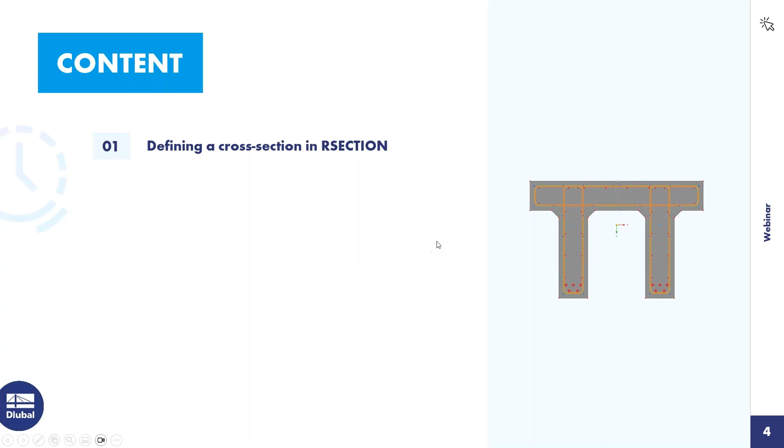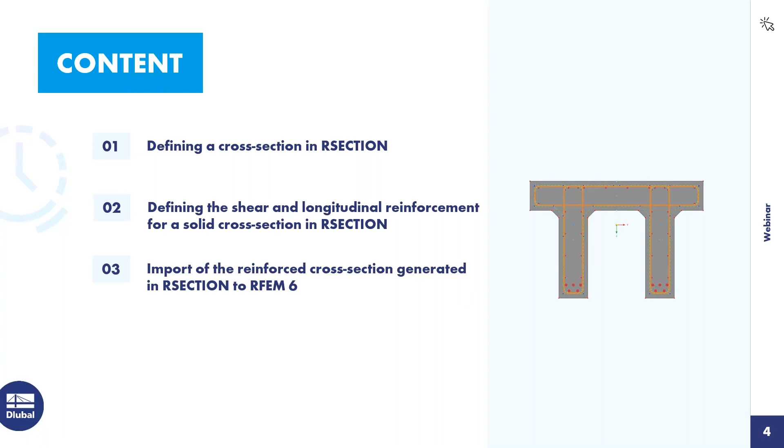To the agenda today: at first we will show you different options to define cross sections in our RSECTION program, meaning Paul will do that. Then he will define the reinforcement for the cross section that you see on the right side. Then Paul will import the section in RFEM 6, and then he will design the cross section in RFEM 6 with the help of the concrete design add-on.

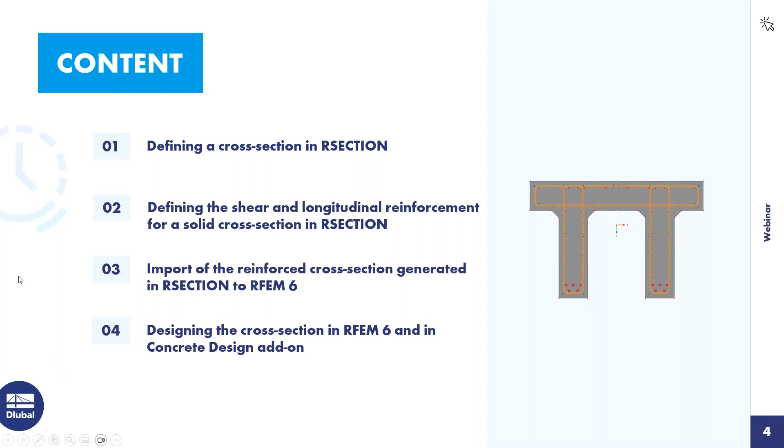Okay, then I hand over the screen to Paul. Paul, it's your turn. Okay, thanks Andreas for the introduction. I can directly start with our standalone program, RSECTION, and I will create directly a new model for our section.

So I'm entering here a model name. Let's just name it 'RSECTION' and maybe '1', because I will show you multiple ways to define a section in this program.

What's important now is if you would like to apply reinforcement on your section and do the concrete design, then you have to check this option here, concrete reinforcement. As you see now, a new tab appeared, reinforcement settings. Inside this tab you can define the value for the concrete covering. It is set by default to 30 millimeters, and for today's example I will leave it at 30 millimeters. I just confirm it.

And then we get this view here. So we have our navigator, our tables, and our graphical window. Now we can just use the options in our RSECTION program to create any type of massive section.

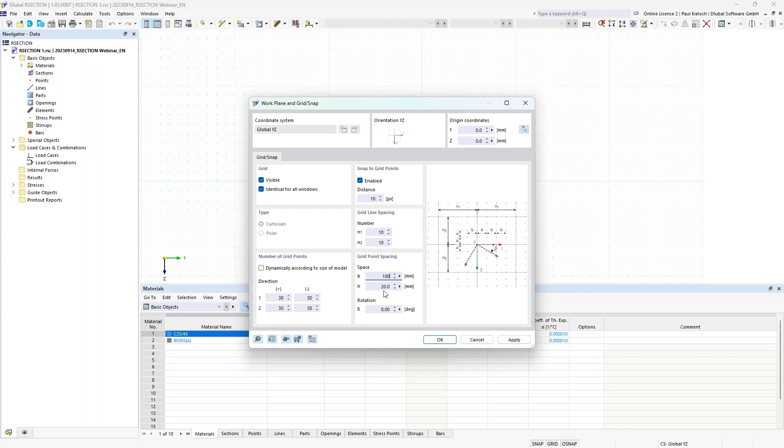I will start here with the first example, creation of a section by using lines. So therefore I will first create or modify the grid. I'm opening the settings for the grid and I will change the grid point distance to 10 centimeters. In this way I can start with the graphical input of the cross section.

Before I do that, I can tell you something about the materials. In this case, the program has loaded 2 materials from my last file, so in this example it already fits perfectly. I need a concrete material for the section and a reinforcement material. If you do not find the proper material, you can apply or create a material in the same way you already know from RFEM 6.

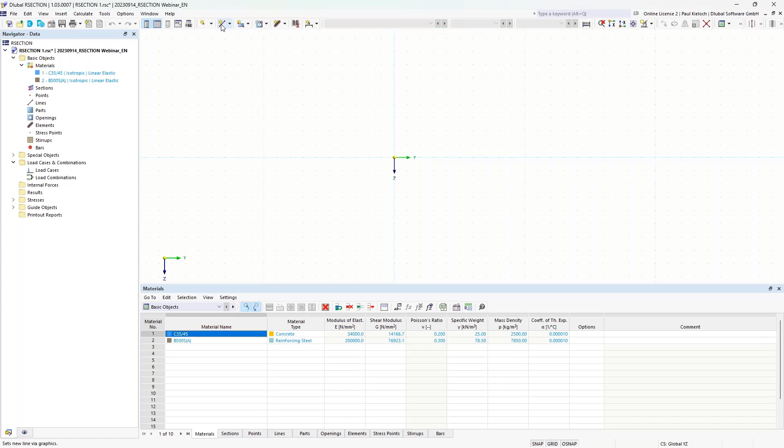As I said, in the first example I will just create boundary lines for a new section. For example, I can do it this way, just clicking into these grid points to create a random section. It could look like this.

If these boundary lines are defined, then you can create new parts. Compared to the old program generation, there we had two programs: SHAPE-THIN for thin-walled cross sections and SHAPE-MASSIVE for massive sections. These two programs are now combined into one new program, RSECTION. So you find here both types, the elements for line elements and also the parts if you would like to apply massive or create massive sections. We are dealing today with massive sections, so I will use these parts to fill the boundary lines with concrete material.

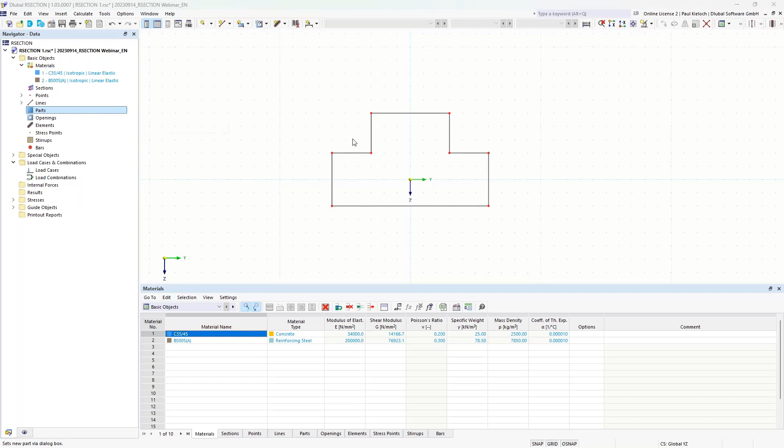I can right click on this chapter and select the option boundary lines. The program has already applied material number 1, and I can graphically select these boundary lines, click OK, and then we see our concrete section, our massive concrete section.

What we also see here are these green lines. That is basically our concrete covering, or the line of the concrete covering. That will be applied in the section once you have activated the option for concrete reinforcement in the base data dialog.

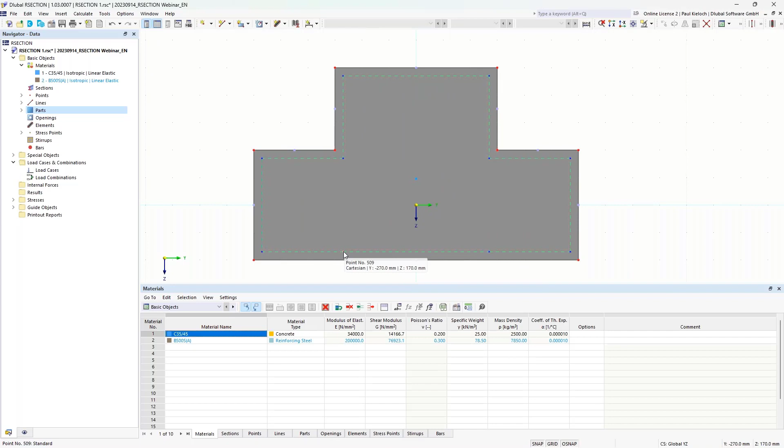What you also see here are these blue dots. They are automatically generated by the program, basically an extension of this line, for example, and the program generates this blue dot. This blue dot can then be used for the stirrups, to define their position. I'll come back to this later on.

So at first, I will just show you 3 basic ways to create sections here in our program.

If you have entered such a section, you can also modify it. For example, you can go into these options in this toolbox, where you find an opening, for example a rectangle opening. If you apply this, the program would automatically generate the concrete covering line for this opening as well. That's the way for the rectangle opening.

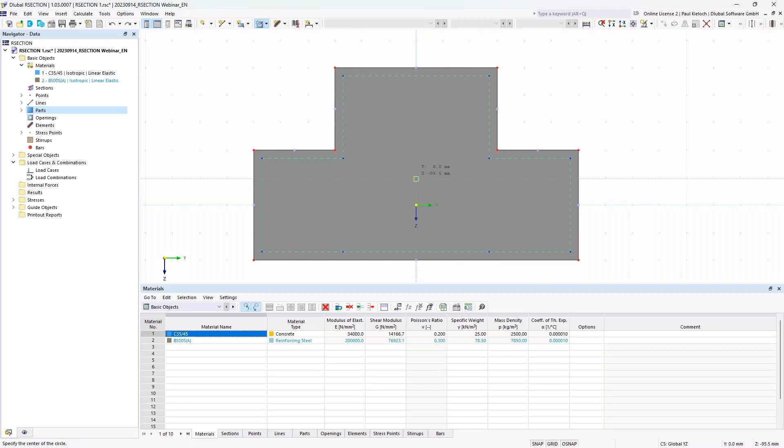If you wanted to enter round or circular openings in a section, for example to create a hollow core slab, you can use this option. If I apply a circular opening, the program would delete the concrete covering. That's because the program currently isn't able to generate the concrete covering for arcs or circular parts, so we can make a short workaround for it.

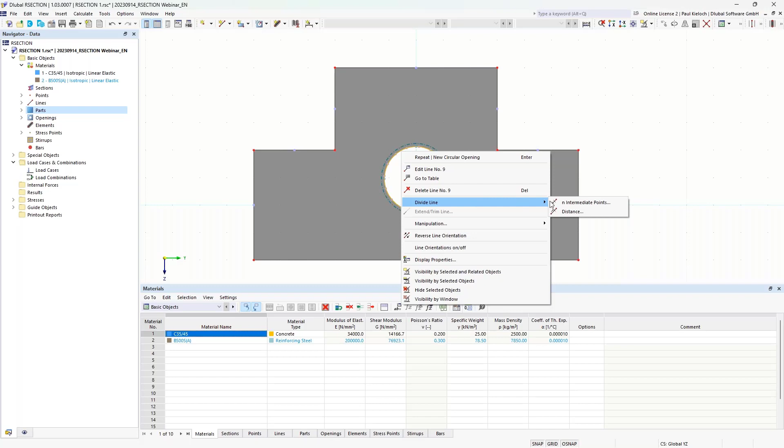I can divide this line by intermediate points, maybe 15 nodes, and then it would look like this.

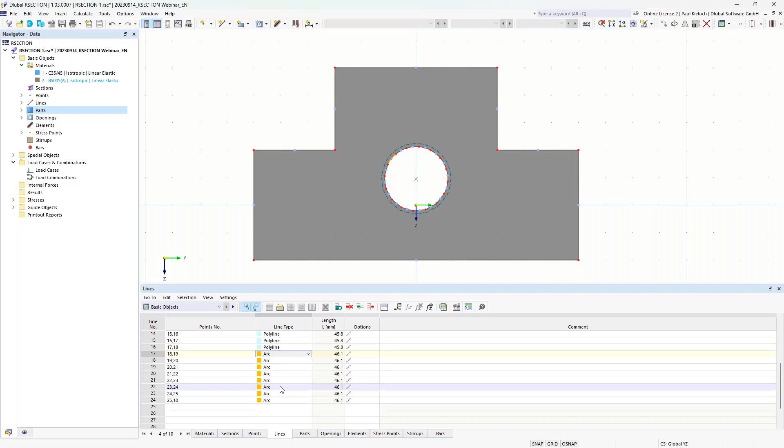Then we can switch to the table with the lines, and you see for the opening the program has applied the line type arc. But if I click on this cell and use the F8 key on the keyboard, I can copy the item from the cell above and apply it to this cell. So I can click through this table and change the arcs to polylines.

If I do it for the last line, the program would again be able to generate this concrete covering line. That's a small workaround in the current state of RSECTION. If you want to apply openings inside a massive cross section, keep in mind that you currently cannot use arcs for it.

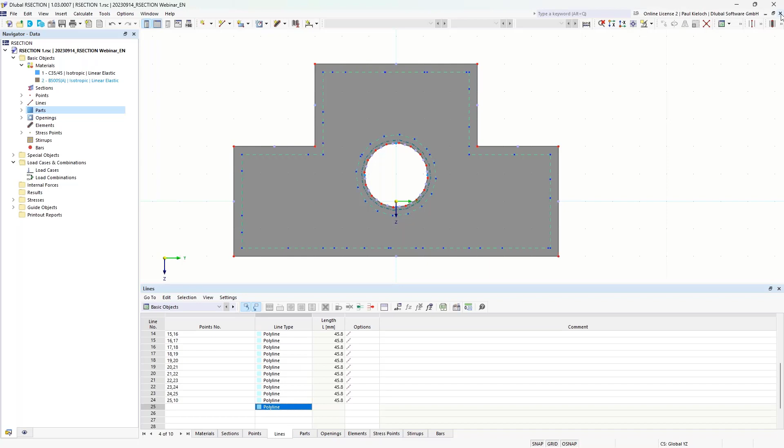Okay, that was the first option. I will save this file, close it, and show you the second option: using the file menu, going to import, where you have the option for a DXF file.

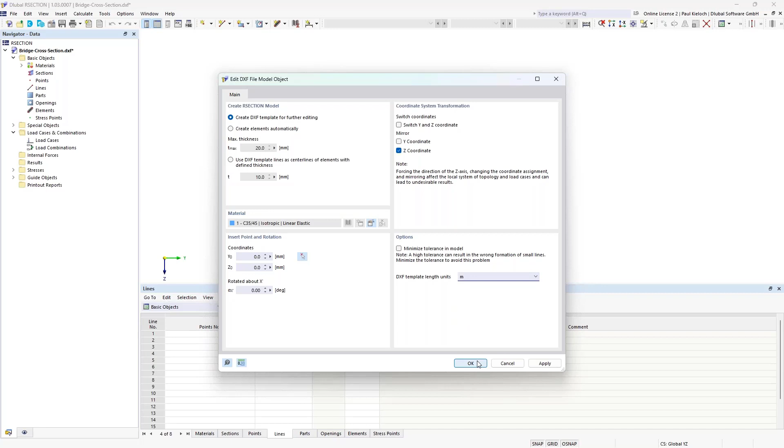I can select my DXF file, click open. Then in this dialog for the DXF file import options, I have to switch or mirror the Z-axis in my example, and switch the dimensions to meter. Confirm with OK, and then I get this section, the shape of a massive bridge cross section. Once again, these are just boundary lines, so there's no stiffness behind the lines.

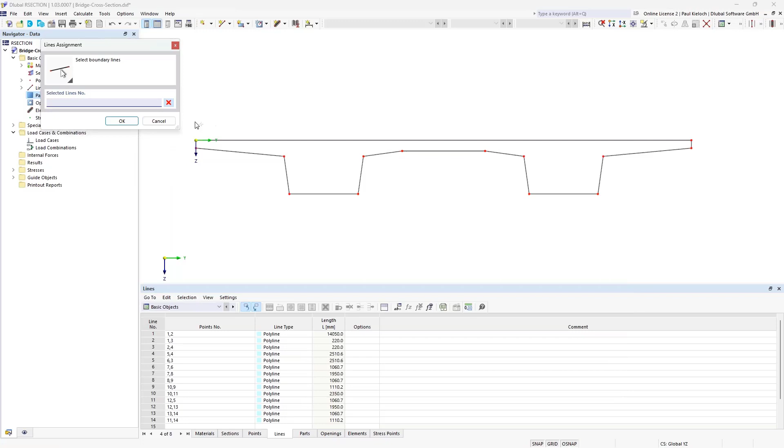So I can once again go to my parts, right click, say new part by boundary lines, select them, confirm OK and OK. What we now see is that our concrete covering lines are missing, because we haven't activated the option concrete reinforcement in this file. So I will save the file.

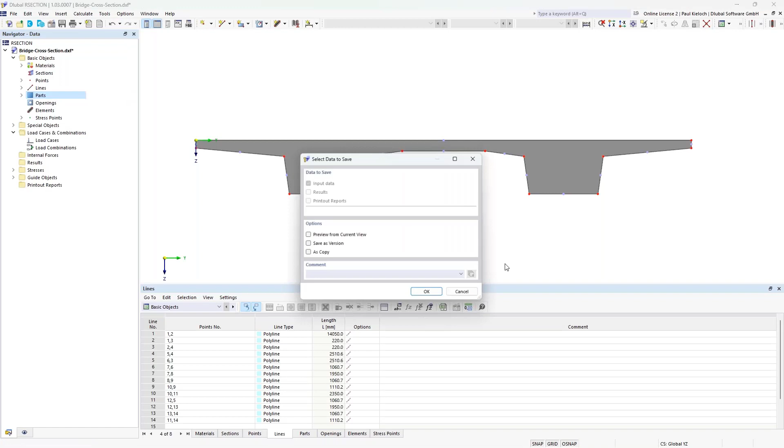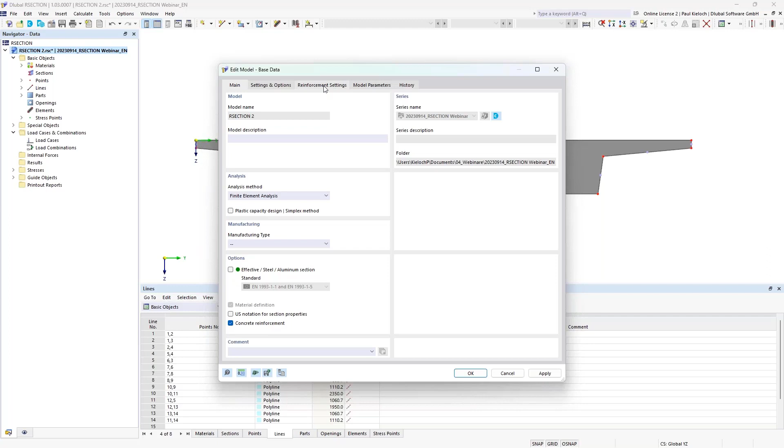Let's call it RSECTION 2 in this example. If I open the base data dialog for this file, I can activate the concrete reinforcement option, and for example change the concrete covering to 55 millimeters, confirm that. Then we see again our lines with the concrete covering, and again our blue dots, our nodes, helpful for generation of the stirrups.

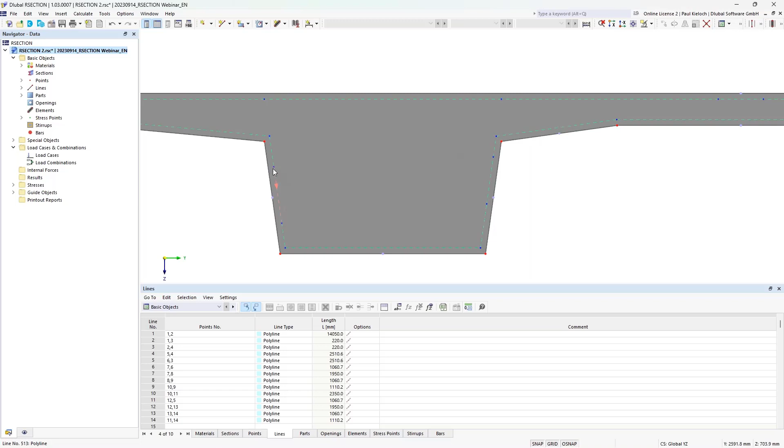This is always just an extended line, for example from this line. If we extend this, we get this node, and so on. Okay, that was the second way, with import of a DXF file.

I will close this once again and create a new one, RSECTION 3 for example. Check on this option once again. I leave the default value here. Now in this example it is important to check the file for the project folder, because later on I will import this section into RFEM 6, and therefore it is required to make sure in which folder you save this file. So be aware of which project folder you create this new file in.

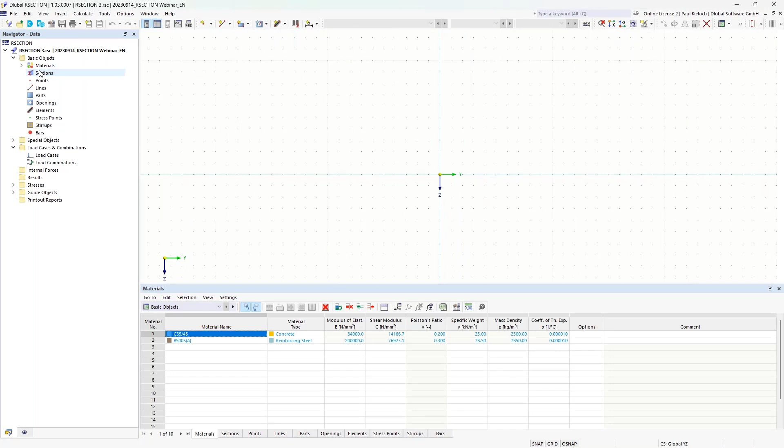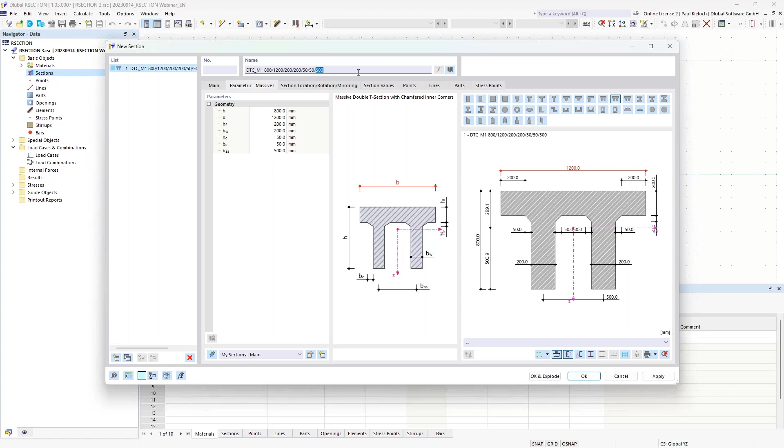The third way how you can create a new section is by using our cross-section library. That is basically the same like in RFEM 6. You can just click here on this button with the cross-section library. Then you have here these massive sections, and for our today's example I will use this cross section here. I will modify the dimensions a little bit by changing the expression or the name of this section, and it will automatically modify the shape of the section. So it looks like this. I can confirm that, and the cross section is created.

Of course, I can now modify the section. I can also assign here openings, like I demonstrated in the first example, or modify the edges or the corners of the section and so on. So you are pretty free in the way you create the sections, and that is a benefit to the regular cross-section library from RFEM 5. You have the option to import a regular section and then do user-defined modification on these sections. Okay, those are the three ways how you can import or create a section.

Next topic would be to apply reinforcement on these sections. As I said before, by default I have already in my example the concrete material that is used by the section, and we have our reinforcement material. Now you can find here in the data navigator these two options or entries: stirrups and bars. So stirrups is our shear reinforcement, and bars are the longitudinal reinforcement.

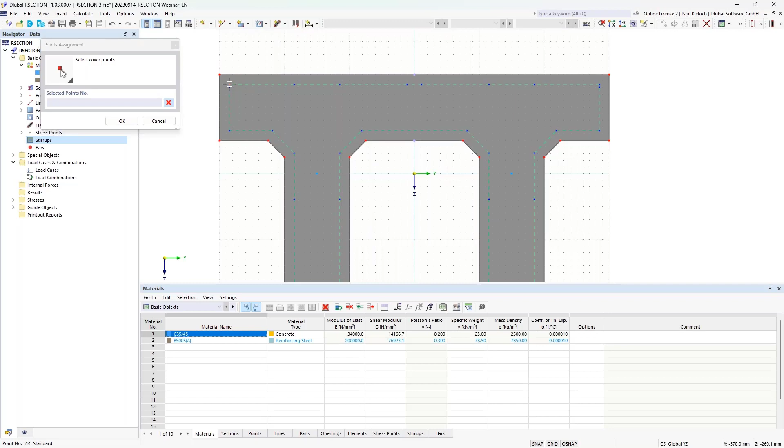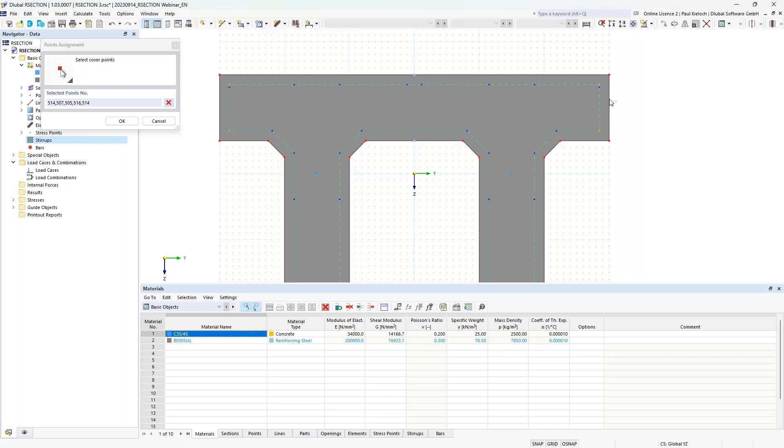So I'm creating a new stirrup. The program has already detected the concrete or reinforcing steel; it was selected here, and I can change the diameter of the stirrup to 10 millimeters in this example. Then we have to check the concrete cover points here. For example, I can go to this upper flange and select the nodes on the corners of my stirrup, and now I have to be aware of the nodes. I have to close the stirrup or shear link by clicking a second time on this first node here, 514, so that the program knows that with the first and last nodes having the same number, the stirrup is closed in this way.

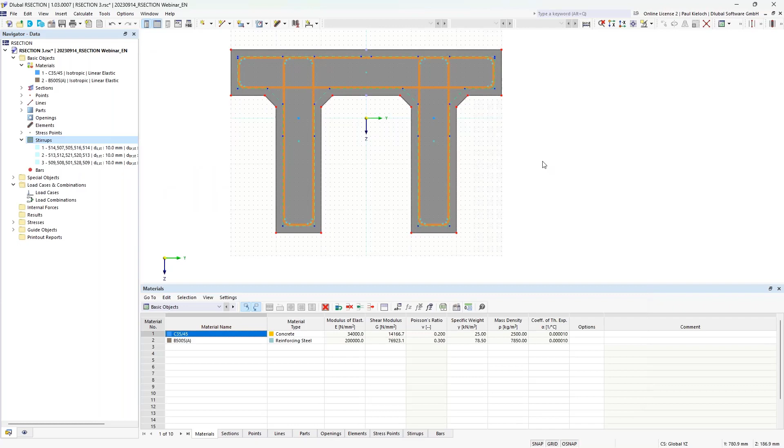And then it looks like this if I confirm it, and that would be our first stirrup here. I can do the same for the web: this point, this point, this point, and this point, and keep in mind to close the stirrup by clicking on the first node once again. Then the stirrup is closed. And the last time here on this side - oh, I missed it. So here: this one, this one, this one, and 509 once again. Then it looks like this. Okay, I will save this.

The next topic is to enter the longitudinal reinforcement, and therefore we use this option, bars. If I do a right click on bars, I can apply new bars and define reinforcement. At first you find here the definition type; by default it is set to multi and uniform, so it looks like this, the rebar layout. Then we also have a variable where we can differ between individual spacing, the distance between individual bars. And then we have options to define single bars, so I will use this option first - applying a single rebar on a certain point.

The program asks me to enter a layer on which I will apply these rebars. In general, you could apply all rebars on one layer, so it would not be a big issue if you did not take care of this layer system. But later on, if we switch to RFEM 6, you have the possibility to modify the length of the individual rebars on the member. Therefore we will need the layer system later, and I will show it afterwards once I have imported this section into RFEM. So I will create a new layer system here for this section.

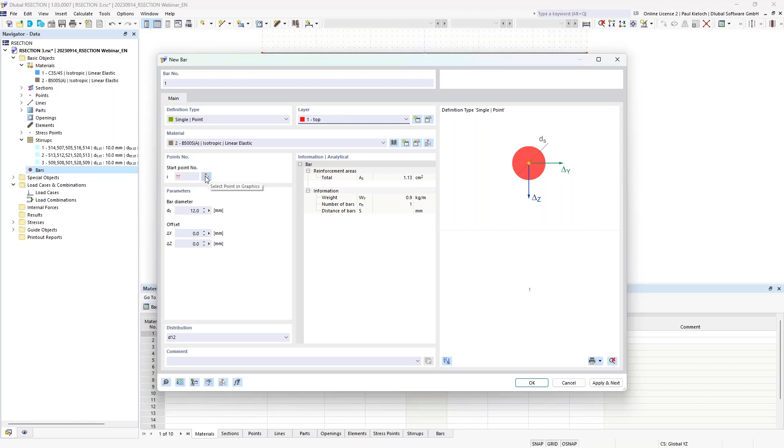And at first I will apply the reinforcement on the top side of this section. So now I can just click here on this button and define the position of the rebar. And that can be done by clicking, for example, on this node here. Click on OK, and then the rebar was assigned here on this point.

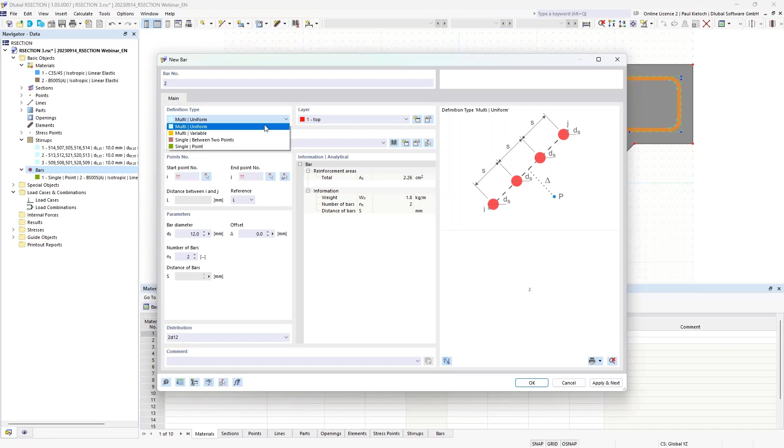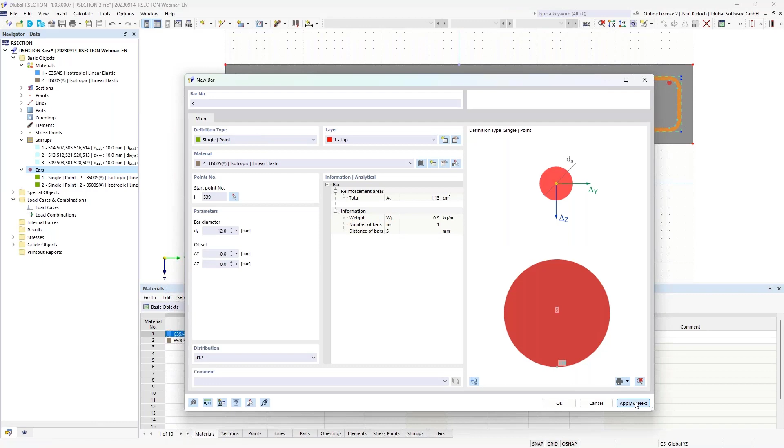Another option would be to click once again here on single. Select this node here, and then I can stay here in this dialog and just click here on this button, apply and next, and then the program will stay here in this dialog, and I can just click on apply next, use the next position, this one, apply next, and maybe on this position here, and okay, and then it looks like this. That would be the way how you can define individual single rebars inside your cross section.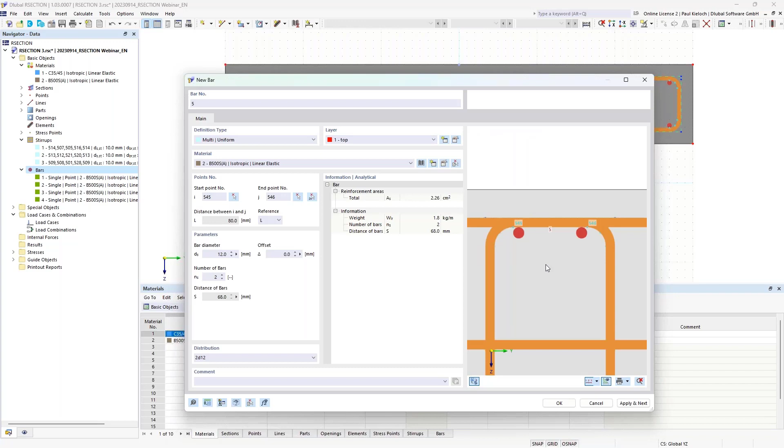Next option here is to use the uniform layout. I will also apply it here at first in the top layer. Select, for example, these two nodes, this one and this one. Then the program shows me here the distance of the two rebars, and if I want to check it graphically before I assign it, then I can click here this button and the program will show me this graphic, how it would look like. For example, I can also modify it here and check how it would look like if I would apply 3 rebars. And if it's okay, then I can click OK and confirm that. And then we would have this here.

And the next option for entering these rebars would be that I can click here on this table line, do a right click and copy this row. If I do so, then I have copied these rebars here, so they have basically the same position, and I can just click into the table here and change the starting points of this rebar number 6, maybe from that here to that node, and then it would look like this. So you can also use these tables to modify the layout of your reinforcement inside the cross section.

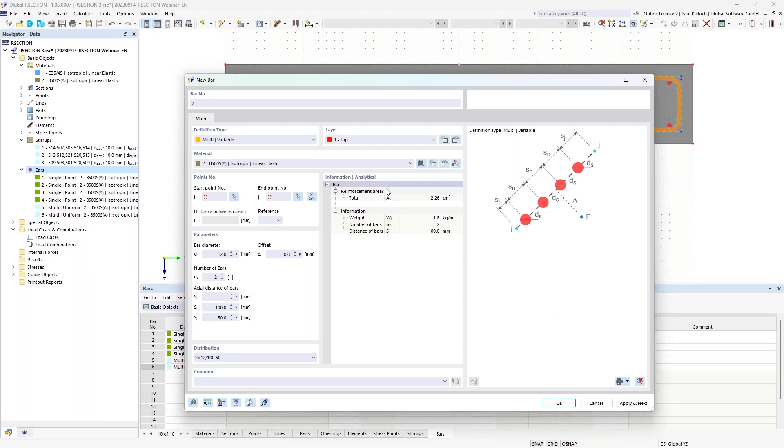The next option would be multi and variable. There you also have to define a start and end point, in this example, maybe here and this one. But now I don't want to apply the rebar directly in this position. I would like to apply it here, maybe on this position, and therefore I can use the options with the axial distance of the bars from the start point and end point.

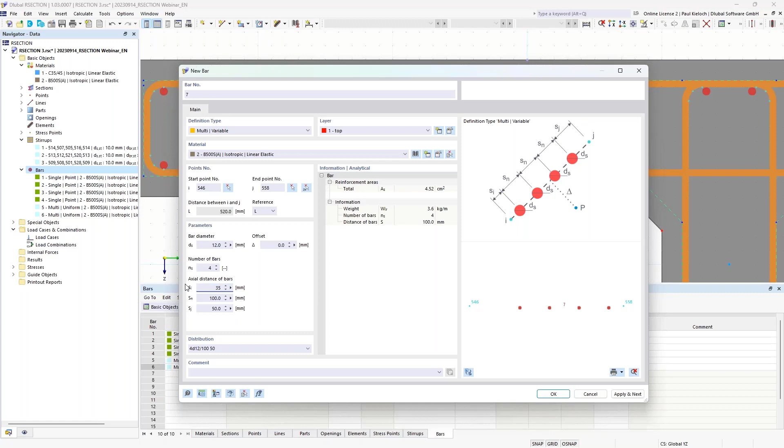So in this example, I would like to use 4 rebars with a diameter of 12 millimeters, and the first spacing should be 35 millimeters, and then 150 millimeters. Then it would look like this. I can double check it here by clicking on this button. It's okay for me, and I can click on confirm, and then it looks like this. So that would be my top reinforcement for this example, and I will switch now to the bottom reinforcement.

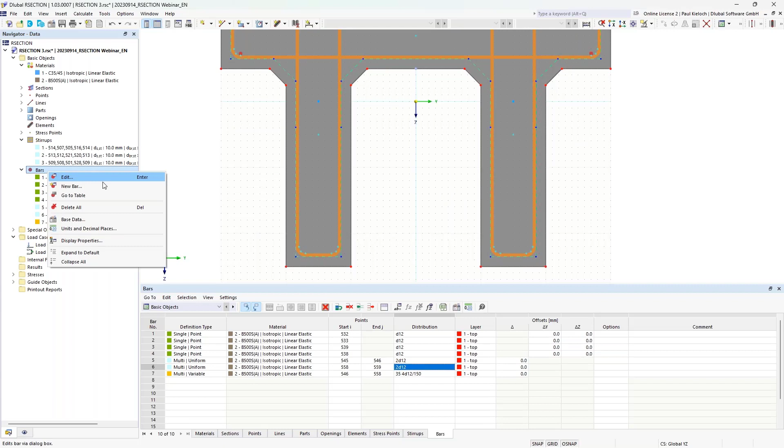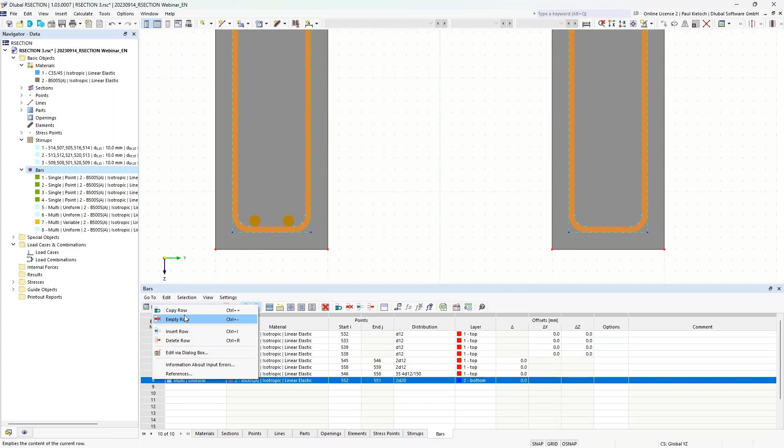That's basically the same as before. I just have to take care about the layers now. This time I will apply it here and use a diameter of 20 millimeters and confirm. And then I can click on this line in the table, right click, copy row, and just modify the start and end point. And then it's simple to copy this reinforcement from one web to another.

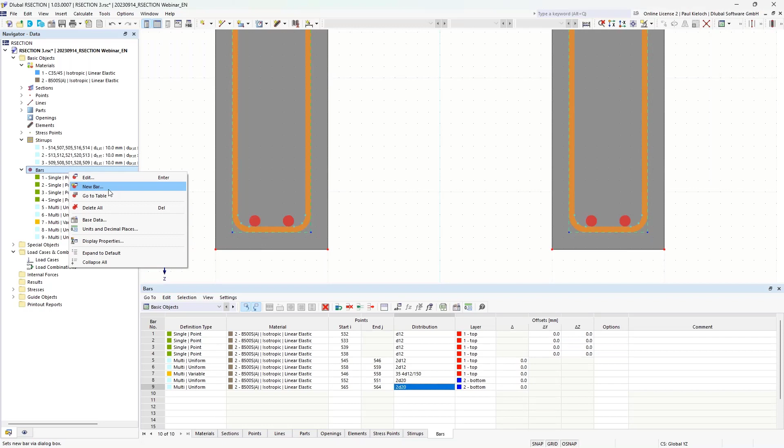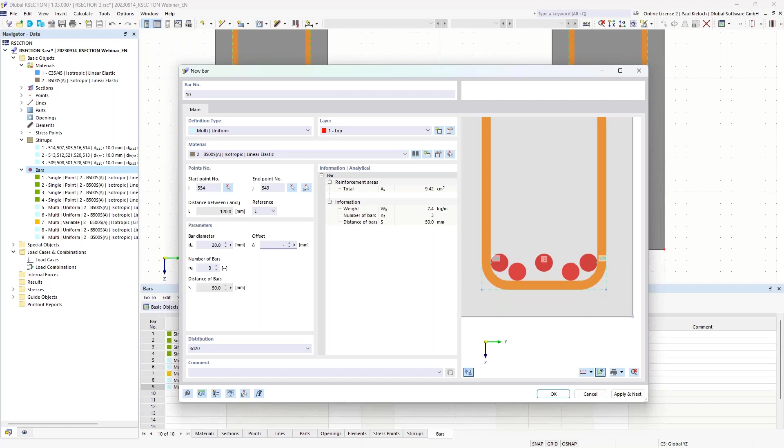Next option I would like to show is working with offsets. Therefore, I'm creating a new rebar once again. This time I'm using the start point, this and this one. Switch to 3 rebars. And if I click on this button to check it in the graphic, then I would see that the spacing between layer number 1 and layer number 2 is maybe too close. And if I would like to change this, then I can use this offset. In my example, I would like to use 30 millimeters for the offset, and then it would look like this.

Click on OK, and then these 3 rebars are assigned here. Once again, I can click here on copy row and just select these nodes. And then it looks like this.

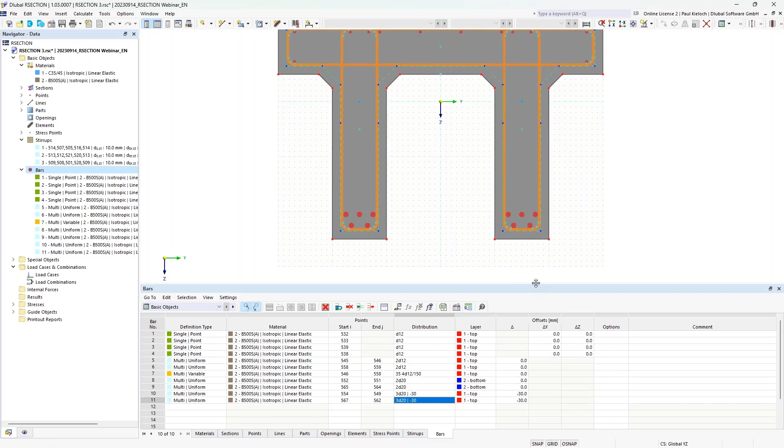Now I missed here the setting for the layer system or for my entered layers, and this can be also checked afterwards. So you see here that I have applied the rebars number 10 and 11 into the wrong layer, so I can click here in this cell and put them into the additional reinforcement. Looks like this.

Okay, and the last would be here the reinforcement on the sides. Therefore, I'm clicking here once again on new rebar, changing it this time to multi and variable. Select the start and end point. Start point should be here, end point should be here. The diameter should be 10 millimeter in this example. Offset is 0 now. I would like to apply 5 rebars.

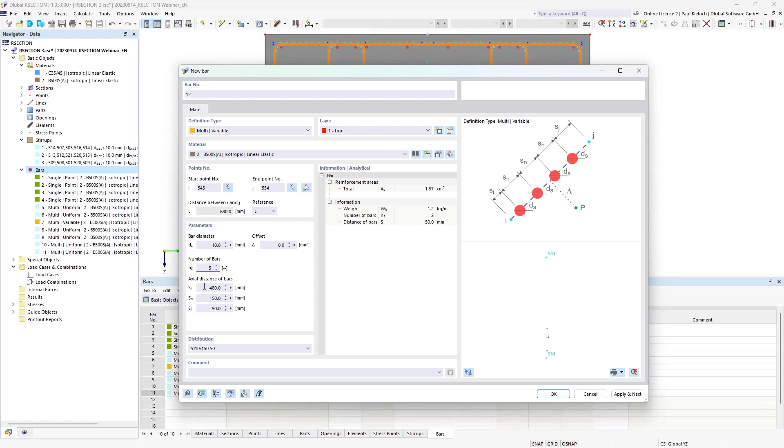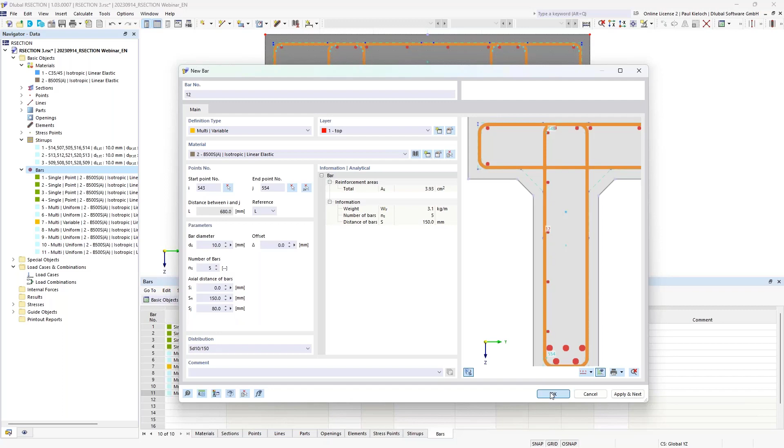The distance from the start should be 0. The spacing is 15 centimeters, and the space or distance at the end and the last point is 8 centimeters. If I click here on this button, then you would see how this reinforcement would look like here in this example. I can click on confirm, and then it looks like this.

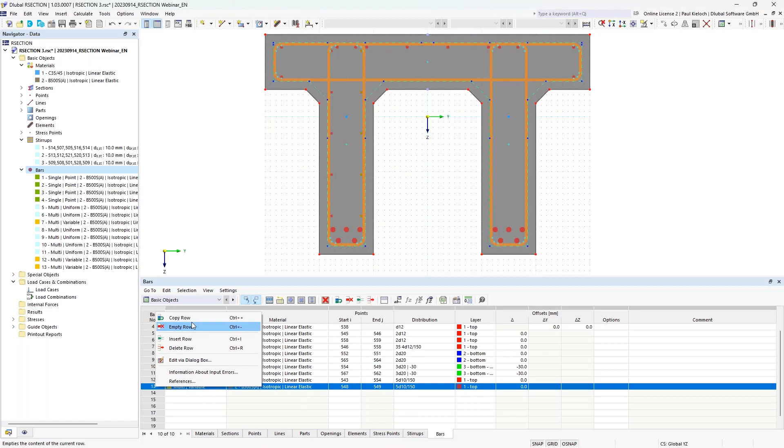And here I can do the same. Copy the row, just modify the start and end point. Copy. Start and end. And the last one, copy, start and end.

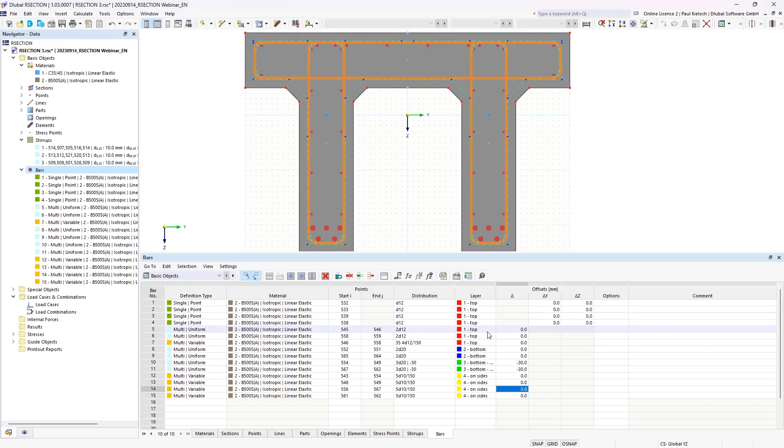And as before, I forgot to switch here the layer, so I will do it here in the table. That is our reinforcement on the sides. Okay, it looks good. So if you have entered all your rebars, then before you import this section into RFEM, it would be always good to check here this layer system.

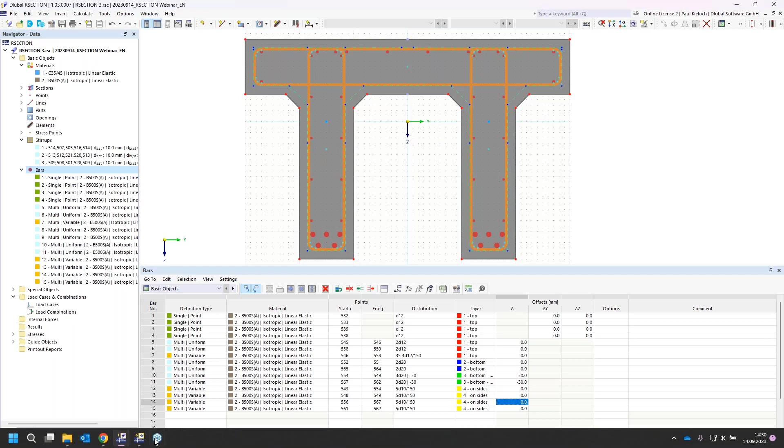Okay, I save it. So this file is now named RSECTION 3. And I will import this cross-section now into RFEM 6 to do the concrete design checks in RFEM 6. RFEM 6 is already opened here on my PC. I will just create a new file, a new model.

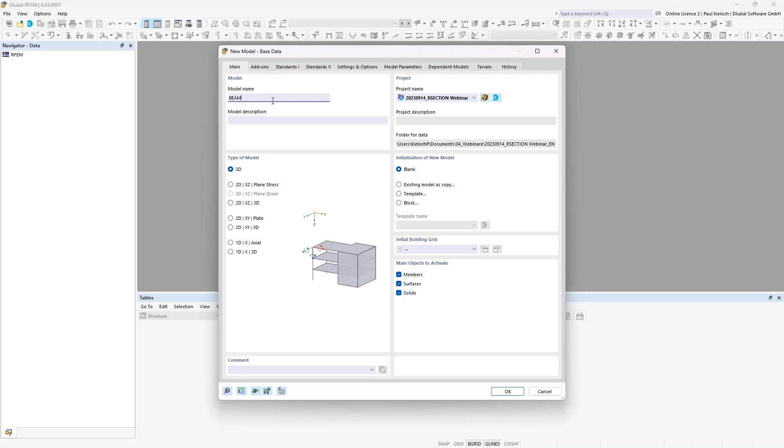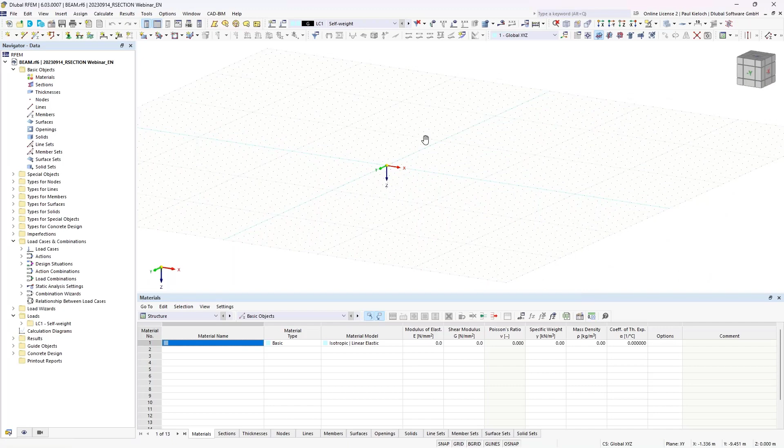Now, as I said before, it's important to check in which project you will create this new RFEM 6 file. I will just say it's Beam. Then I'm switching to the add-ons. For sure, I will have to check on the concrete design add-on for this example. And in general, it doesn't really matter which annex I will use here for this example, but I will choose the German one here. That's okay so far. Confirm is okay. And then we have an empty file.

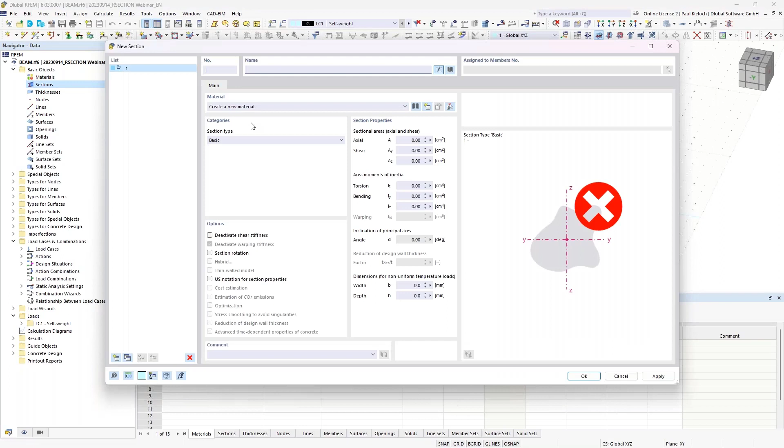Normally, if you would create a new section, then you would at first create your materials. But in this example, if we import a new RSECTION section, then we do not need to create new materials, because these materials will be automatically imported also by the RSECTION file. So I can directly do a right click here on the sections, go to new section, to our library, and then I find here this button from RSECTION.

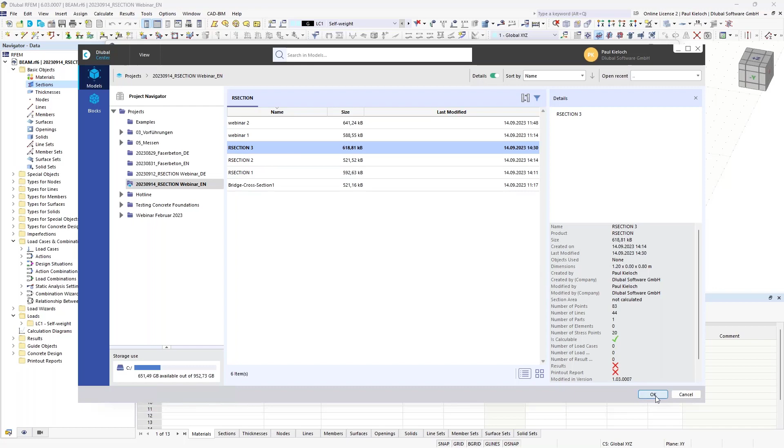And if I click on this button, then you see here the small window, and now the program is searching for all my connected projects, and there I can go to RSECTION 3. That was the cross section which we have created now. I can click on OK. And you see our section here inside RFEM 6.

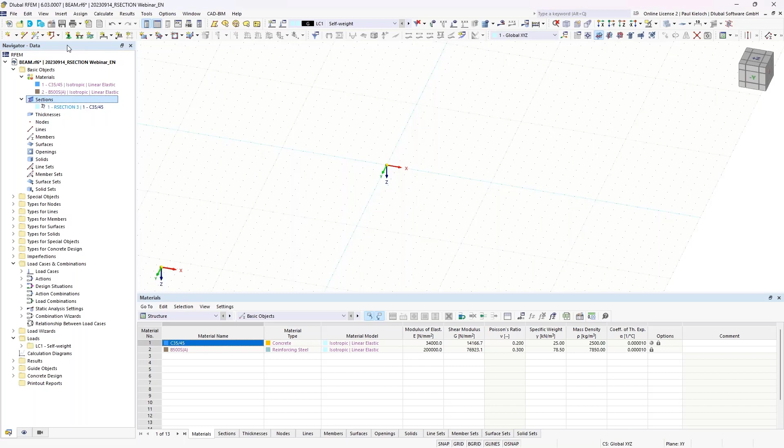I can confirm that. And if we open here the entries for the materials, then you see our concrete material that was used in our section, and also the reinforcement material that was used. And it is here not in black or in blue, it is in purple to show you that it is a generated item. Okay, that is our section, and we can directly create a new beam by using this section. And in this example, just a very simple beam like this.

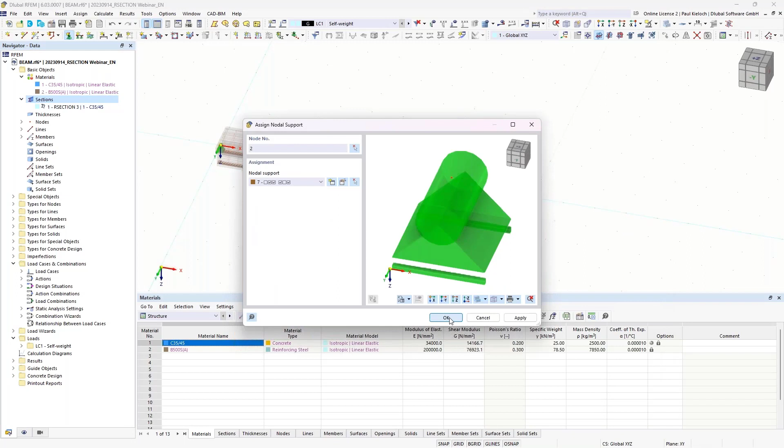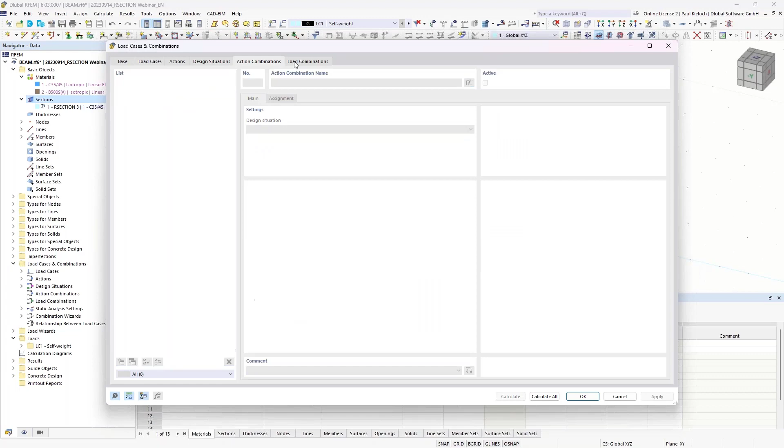Then I will apply here a support. Okay, and at the end, in this way. Okay, so the beam was entered, also the supports, and now I just have to take care about the loading and the combinations. Therefore, I will create a new load case with live load and change the action category here. So the program will automatically generate our load combinations.

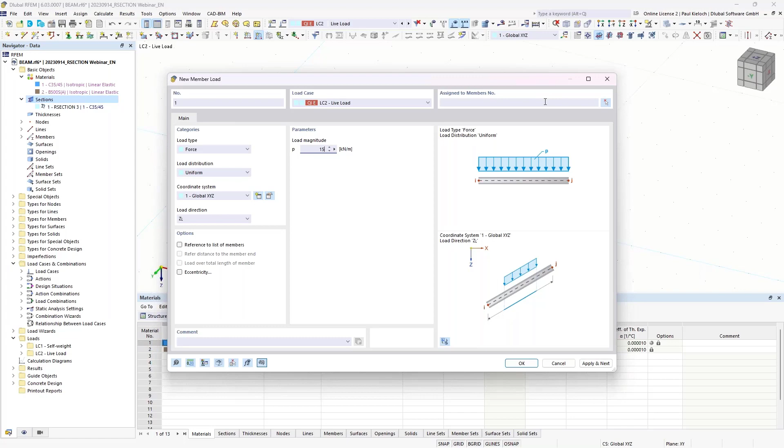Confirm that, and now I apply here a self-weight of 3 kilonewtons per meter on member 1. Click on Apply Next. Then I switch here to live load and change to 15, and it should be also applied on member number 1. Confirm is OK. And then we have entered our loading, and I can switch to the combination 2, for example, and our loading would look like this here for the ultimate limit state, or for example for the serviceability, like this.

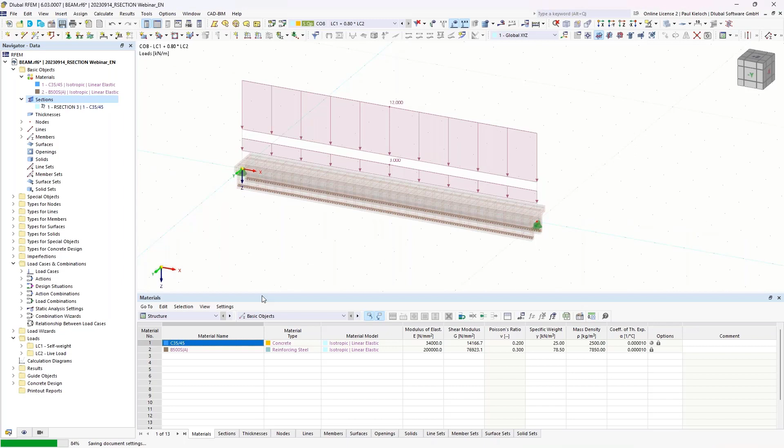Okay, I can save this, and basically I can directly start the calculation in the add-on. So the program will calculate the internal forces, and then start the design checks in the concrete design add-on. And it directly works out here in this way.

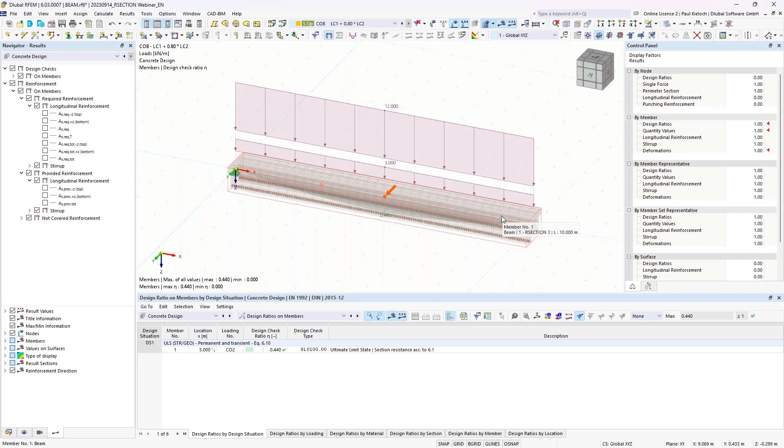Now we can do some modifications also on the reinforcement. So if I would like to change something on the layout of the rebars inside the member, then I can open the member and switch through all these tabs here.

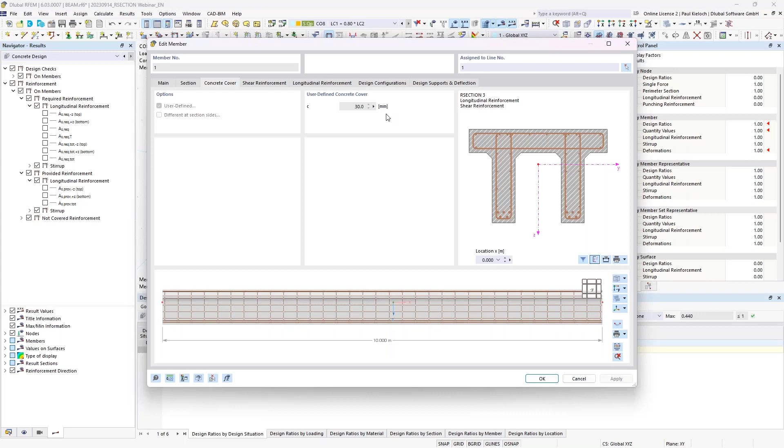For the concrete covering, for the regular sections, you would be able to define these exposure classes. For the imported RSECTION cross sections, it is not possible. There, the concrete covering was defined in RSECTION, and you have just this cell with the information which concrete covering will be applied for the design checks. If you would like to change it, then you have to switch back to RSECTION, change it there, and import the cross section once again.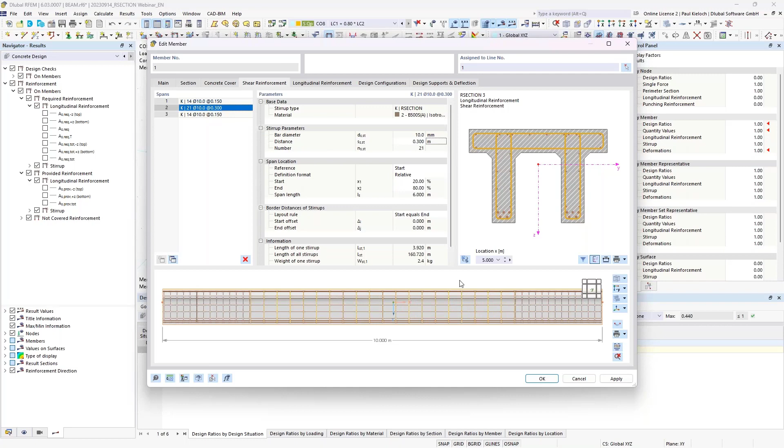For the shear reinforcement, the program has created one span, and by default the program would apply this layout from RSECTION with a spacing of 30 centimeters. Of course, you can modify the spacing, and you can also click here and copy the spans. So for example, you will get 3 spans, then you could change the length of the individual spans and say the middle span should start at 20% of the member length and go to 80% of the member length. And then you could change the spacing for the middle span, and then it would look like this, for example.

So the shape of the stirrups or shear reinforcement was defined in RSECTION, and the spacing can be afterwards modified in RFEM itself. So RSECTION is just used for entering the shape of the individual stirrups.

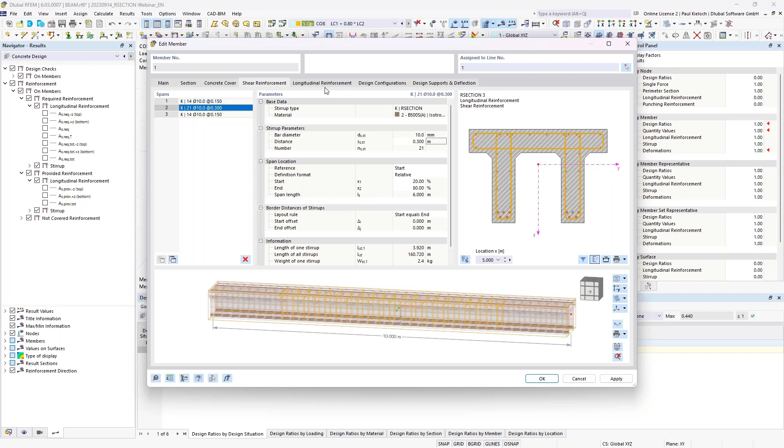Next topic would be the longitudinal reinforcement. And there you see these items 1 to 4. These items are generated by the layer system in the RSECTION file. Like I said before, I have entered 4 layers in RSECTION, and the program now creates 4 items. So for every layer from RSECTION, you will get 1 item in RFEM.

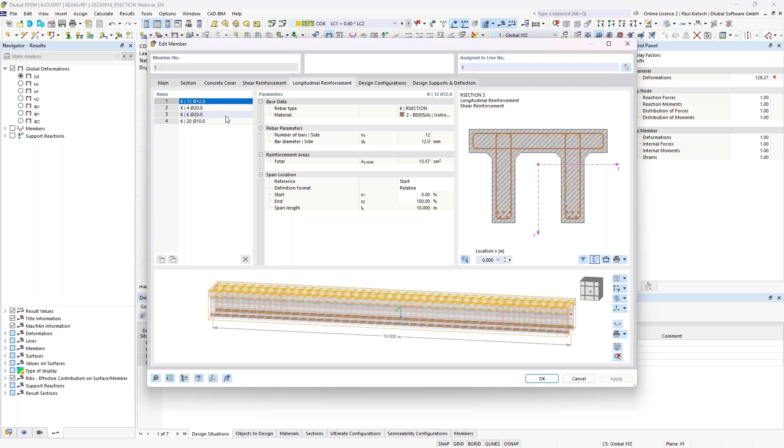And now I can click on my 3rd item. That was my additional reinforcement on the bottom side, and then I can change the length of this additional reinforcement. It should, for example, go from 20% to 80%, and then it would look like this. So once again, where the reinforcement is exactly located inside the cross section is defined in RSECTION. And after you have imported the RSECTION layout into RFEM, you can modify the length of the individual items. Okay, that's basically all we can modify in this dialog.

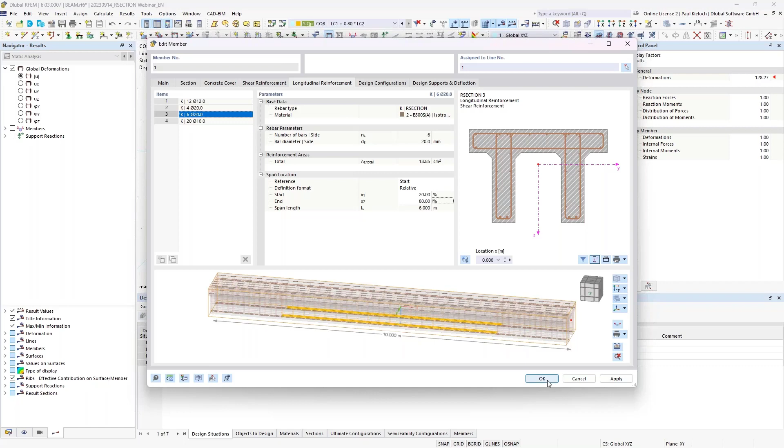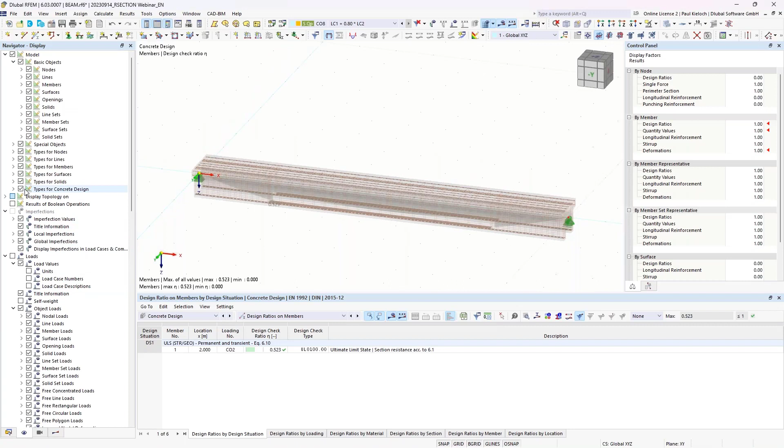I can confirm, then it looks like this. And I can click once again on calculation, and the program will do the calculation once again in the add-on. Then I will switch off the loading and also the rendering of the reinforcement, switch to the wireframe display model, and we can check the results.

Okay, so what you currently get if you do a design check with RSECTION is the design check UL0100 in concrete design. So it's basically a general design check for sectional resistance, for normal force, bending, etc. Currently, the design checks for shear force and the serviceability limit state design checks are not supported. Currently you have basically the same state as in the old program generation with SHAPE-MASSIVE. But we are working on a solution so that we will have in future the option to do shear force design checks and serviceability limit state design checks.

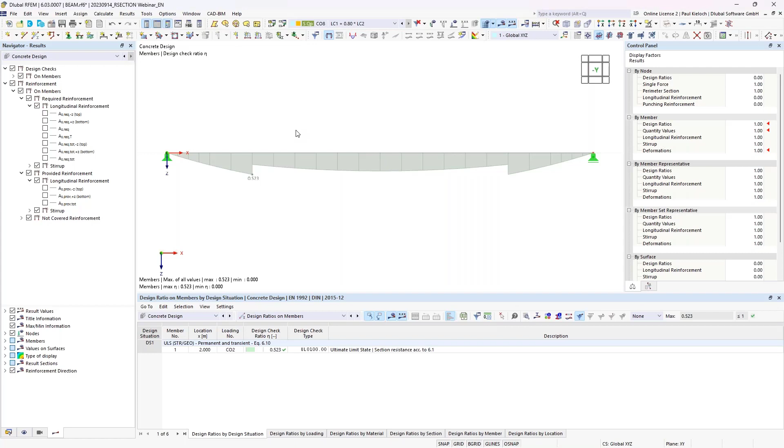So that is my design check for the member, but I can switch also to, for example, the required reinforcement on the bottom side and compare it with the provided reinforcement on the bottom side. I can increase the display factor a little bit. Then it looks like this. And we see that our provided reinforcement is covering our required longitudinal reinforcement on the bottom side, just as a very simple example on this section.

If you would like to see further details from the design checks, then you can click on this cell in the table and open the design check details.

Basically, it's the same as for regular cross sections in RFEM 6. You can also click here on the diagram in section and check the concrete stresses and steel stresses, etc. In this example, it was for the X location at 2 meters.

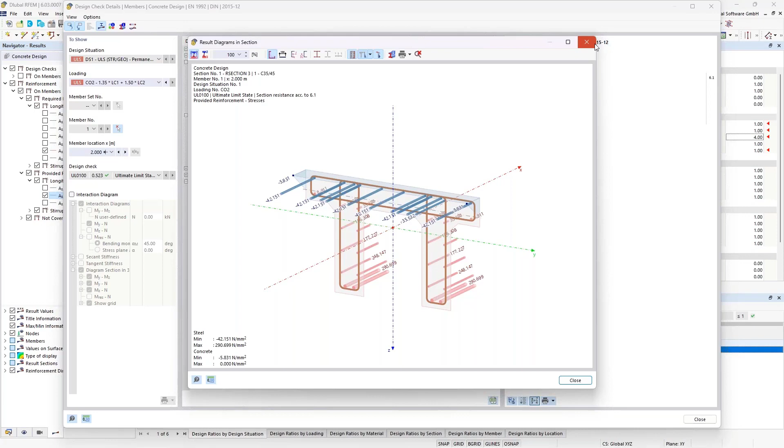That's on the side where we do not have additional reinforcement. If I would like to show it for the additional reinforcement, then I can switch to the other side here and open it once again, and then you see the stresses in the additional reinforcement, for example.

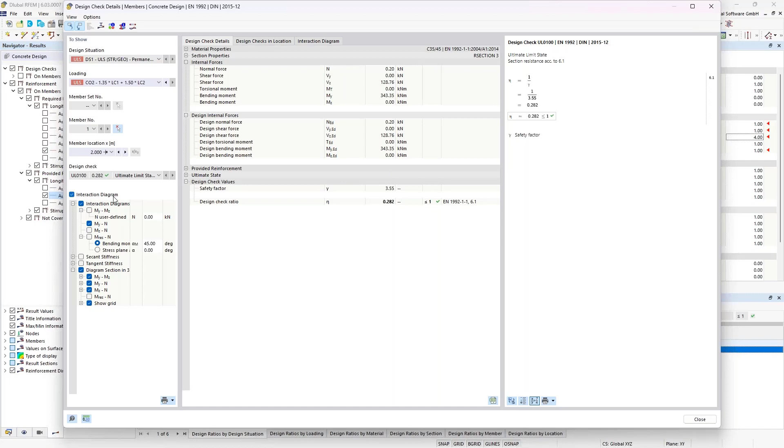What's also possible is to activate the interaction diagram. You can click here on this option. If you have activated this interaction diagram, then you get this additional tab, interaction diagram. It looks like this for this example. And then you can switch which interaction diagram you want to check or see.

My example is pretty simple, so it makes no sense to make big changes, because I have just MY from the loading in my example. But you see here the shape of the interaction diagram, for example, for MY and N.

In this example, I can switch from the X location without additional reinforcement to X location 2 on the right side with additional reinforcement. You see it here. Oh, it was this one. So this one and this one. There you see how the shape of the interaction diagram is changing. That is caused by the change of the provided reinforcement.

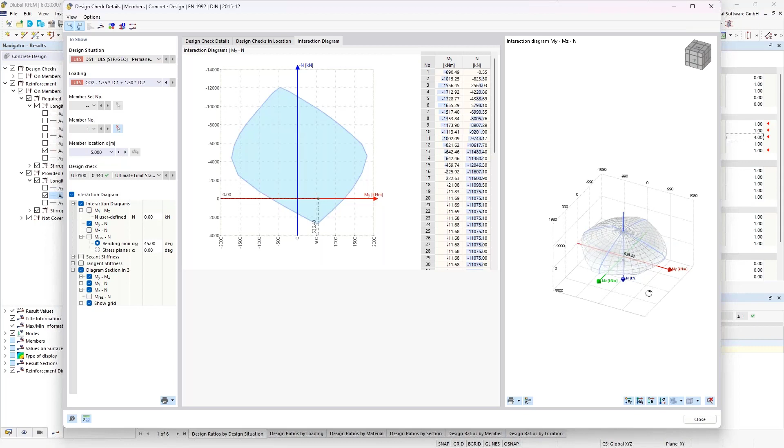And if you go further into the middle of the beam by clicking on these buttons, then you see our acting moment. The middle of the beam would be at 5 meters. And we have our moment in this interaction diagram, and you can also check it graphically here.

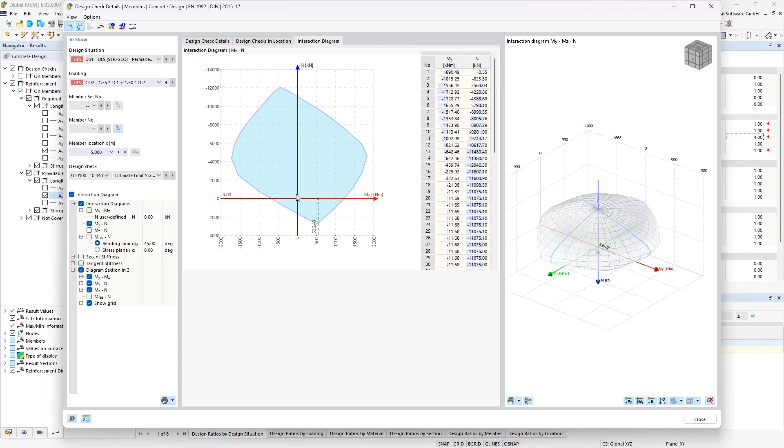That is also a feature which you have for the regular sections in RFEM 6, but it's also available for the user-defined massive cross sections from RSECTION. That is basically what's currently possible in RSECTION in combination with RFEM 6. Like I said before, we are still in development, so that is the state of summer 2023 or early fall 2023.

As I said before, we are also working on solutions for the serviceability limit state and shear force design checks, and then you also have benefits compared to the old solution in SHAPE-MASSIVE.